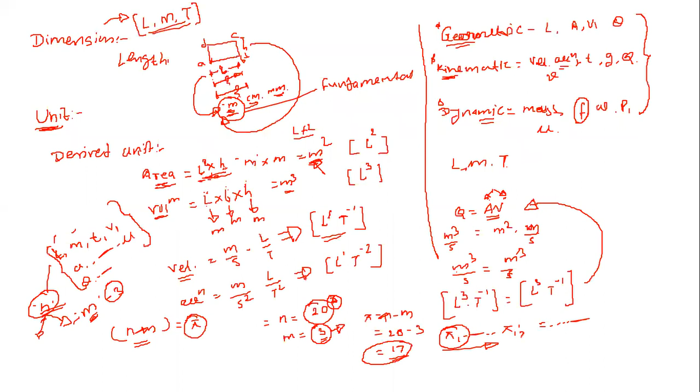Now in today's session, we'll start the next part, that is model, prototype, similarities, similitude, etc.

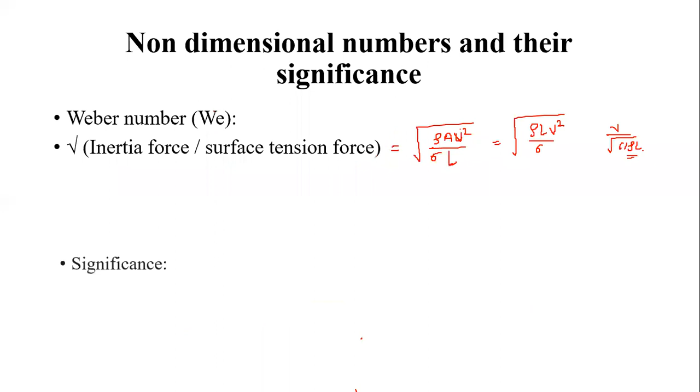In the previous class, along with the Buckingham Pi theorem and its significance, we discussed dimensionless numbers and their significance. We discussed the Froude number, Reynolds number, Euler number, Mach number, and Weber number, along with their significance, and we also discussed examples asked in various GATE examinations.

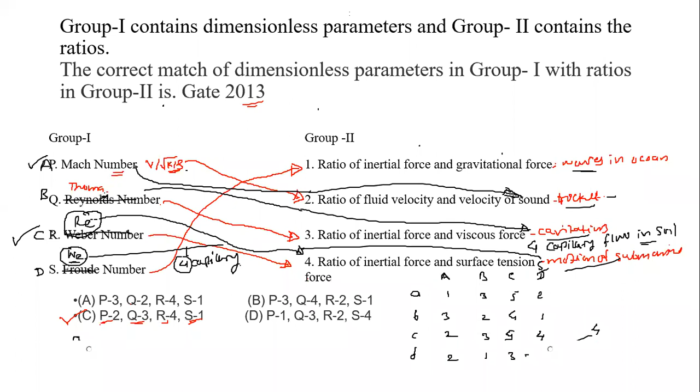Now, today we'll go for the types of similarity, but firstly, before proceeding to the types of similarity, I would like to highlight the things related to model and prototype. What does it mean by model, and what does it mean by prototype?

So, a model is nothing but a replica. A prototype is an actual machine, whereas the model is nothing but the replica of that prototype.

As an example, whenever we want to prepare any plan of a building, that may be 2D or 3D in AutoCAD, whatever sketch we prepare in AutoCAD is nothing but the model of the actual machine or actual structure which will get constructed in reality on the ground. It means whatever building you are going to construct on the ground, its replica we are making in the AutoCAD software, and that is nothing but the model of that structure.

Similarly, whenever we want to construct any big hydraulic structures, for example a weir, a dam, hydropower stations, or a bridge, it's required to go for analysis of the structure under various forces. We have to analyze the behavior of the structure under the application of various forces.

Because if there is submergence or overflow of the dam, it happens rarely, but in case of weirs, it happens frequently. During the monsoon season, each and every weir undergoes submergence.

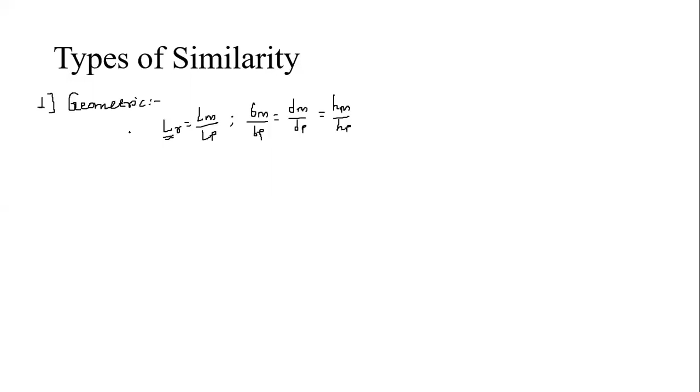Then the next scale ratio that comes under geometric similarity is the area scale ratio - area of the model divided by area of the proto. If this ratio comes out the same, then we say there is a geometric similarity for the area scale ratio.

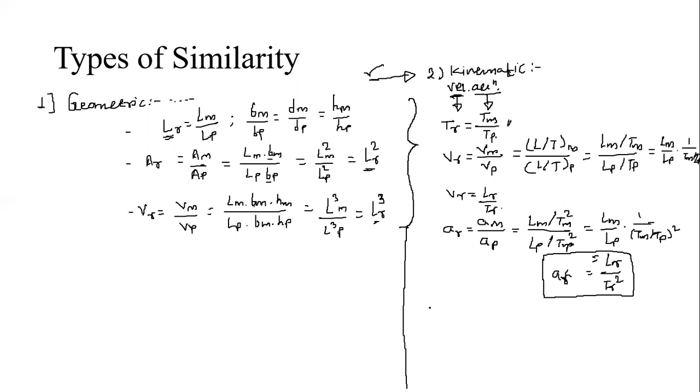Or the next similarity for kinematic similarity is about discharge. So that is QR, the discharge scale ratio. That is discharge in the model divided by discharge in the proto at a particular point or location, QM by QP. Now we know that discharge has unit meter cube per second.

Meter cube per second means length cube in the model divided by time in the model, divided by, for the proto, length cube of the proto divided by time in the proto. So that equals LM cube divided by LP cube into 1 by time in model divided by time in proto. That equals the cube of the length scale ratio upon the time scale ratio. This is about the discharge scale ratio.

It means if these three similarities exist between the model and prototype, then we can say that the model and prototype are kinematically similar to each other. Whatever discharge is happening in the model and prototype, whatever fluid is flowing through it, if its velocity, its acceleration, and the discharge in the model and prototype at a particular location are the same, then we can say that model and prototype have kinematic similarity. And to have kinematic similarity, geometric similarity is a must.

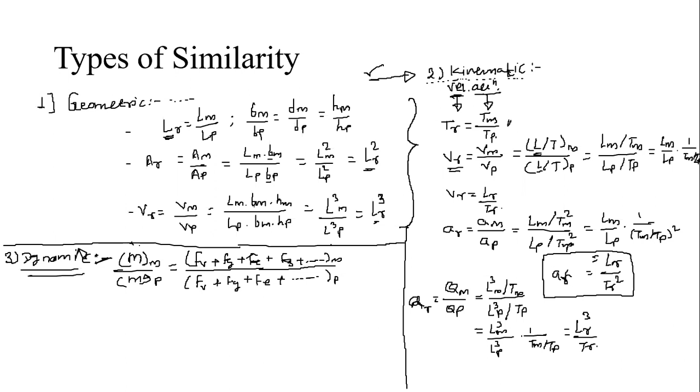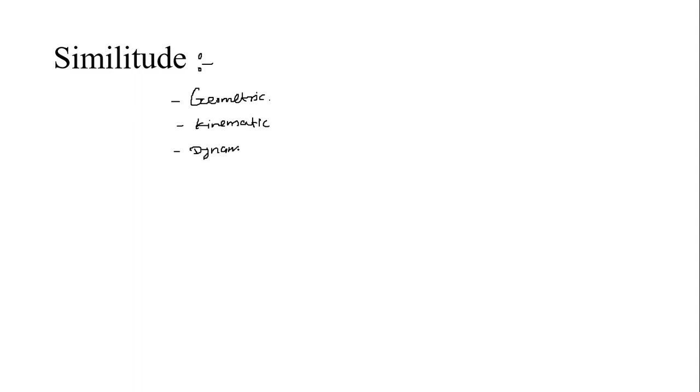If there exists geometric similarity, kinematic similarity and dynamic similarity between the model and prototype, then it is considered a similitude. Meaning, if you say a similitude, it means that particular model and prototype are geometrically similar, then kinematically similar, and the third one is dynamic similarity. If all three similarities exist between the model and prototype, then we say that is a similitude.

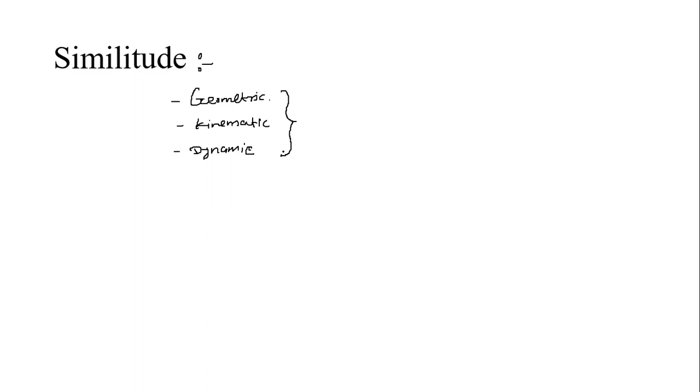Okay, this is about the basic idea of similarities and similitude. Now, to have those similarities, or to govern those things, different model laws are established, which are also called similarity laws. The similarity laws we are going to study here are the Reynolds and Froude models. So what are the Reynolds law and Froude law? We are going to discuss these model laws or similarity laws in detail now.

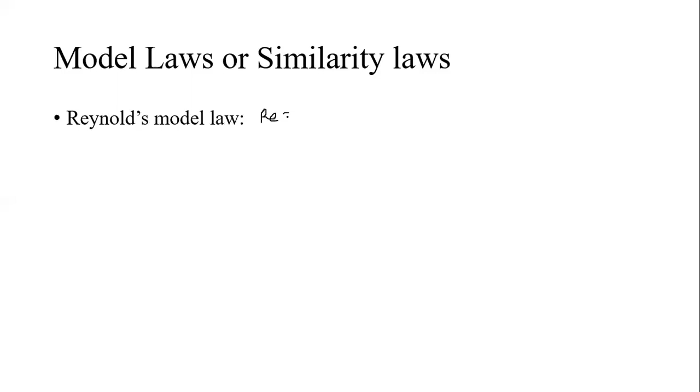Okay, first one is the Reynolds law. What is the Reynolds law, or what is the Reynolds number? Reynolds number is nothing but rho V D by mu. In short, I would like to go for Reynolds number, Re equals rho V D divided by mu, where D or L is the characteristic dimension. Most of the time, for pipe flow, or for rivers and streams, we consider the dimension as length, that is rho V L by mu.

This is our Reynolds number. It means that for the fluid flows, for the flowing fluid where the viscosity is the dominating force, then in that case, to have a similarity or to bring the similarity between the model and prototype, we need to go for the application of the Reynolds law. That is, when we come across flow conditions where viscous force is a dominating force, then in that case we need to go for the Reynolds law and the Reynolds model law.

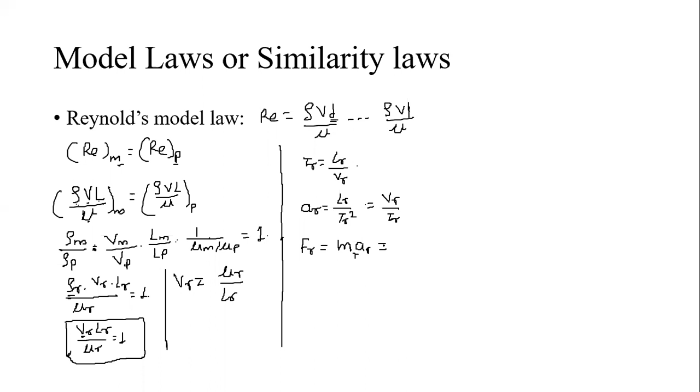Then for the force scale ratio, as per the Reynolds law, force will be equal to mass into acceleration - rate of change of momentum with respect to time due to the application of the force. So m into a, that is mass scale ratio into acceleration scale ratio. Mass per unit time is density into volume, that is volume per unit time, that is Q as area into velocity. So that will be density rho r into ar into vr, that is velocity scale ratio, into the acceleration scale ratio as ar as it is. This is for the force scale ratio.

And for the discharge scale ratio, qr will be area into velocity, that is area scale ratio into the velocity scale ratio. This will be the combination for that.

Those are the various ratios we can say as per the Reynolds model law. When we have to go for the Reynolds model law, whenever the dominating force or the fluid condition given to us is having a dominance of the viscosity force, then in that case, for the preparation of the model of that prototype, we need to go for the Reynolds model law. By applying that Reynolds model law, we will be able to predict the various dimensions related to that prototype.

From the various dimensions of that model, for the given prototype, it means it is applicable mostly for the motion of the airplanes. There, what should we do? In the motion of the airplanes, we need to go for Reynolds model law. Then flow of incompressible fluids, that is flow through the pipes. Motion of submarines which are fully submerged in water. Then flow around structures, that is weirs or piers we can say, and other bodies, those are completely immersed in a moving fluid.

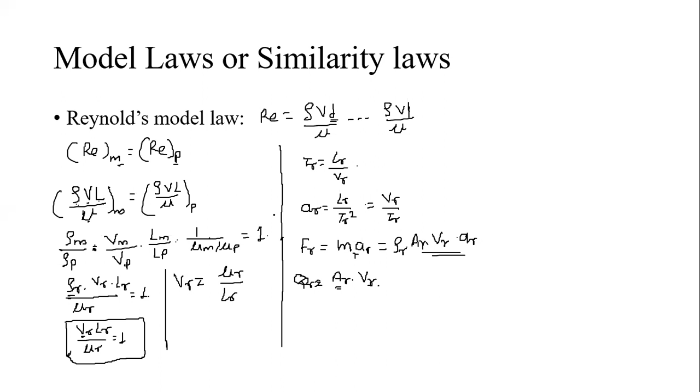Then the next one is the Froude model law. Means for the construction of the structures, or sorry, construction of the models of various structures where the flow is due to the gravity, in such cases we need to go for the Froudian model law or the Froude model law. So we'll go for that Froude model law now.

Where will we be required to go for a Froude model law? That also we will go for significance at last. But at the beginning, I want to have an understanding about that. Whenever the flowing fluid or the motion of the fluid is due to gravity, or whenever the gravitational force is a dominating force along with the inertia force, then in that case we need to go for the Froude law. So as in the previous case, whenever we are going to design any model of a prototype based on the Froude's law, or where the dominating force is the gravity, the first assumption is that the Froude number at a particular point in the model must be equal to the Froude number at a particular point in the prototype.

This is the basic idea. Then we have to go into details, meaning we have to put up the equation formulae for the Froude number. This formula is related to the flow under gravity, so it is related to open channel flows most of the time, or flows having a free surface, a top free surface. I would like to go for the formula like that.

In general, we know the formula for the Froude number as v by root gd. So here the formula will be velocity upon the square root of g into, instead of d, I am considering here a length. Length of the channel or cross section of a model must equal the ratio of velocity with respect to gravity and length of a prototype. If these things exist, then we can say there is an application of the Froude model law, or the particular model is designed based on the Froude law.

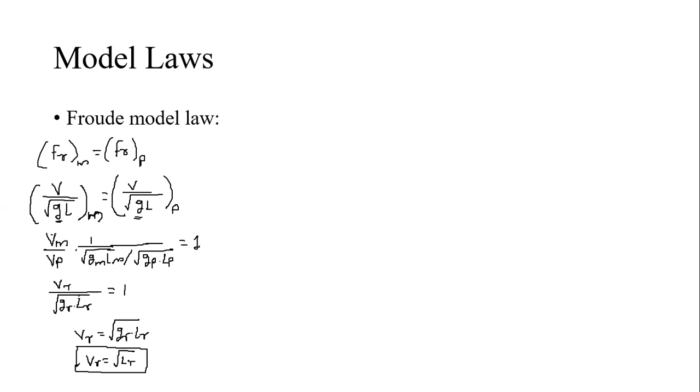Now the various scale ratios related to time, velocity, acceleration, force and discharge from the Froude's model law, we'll derive them now.

First one I have to go for is the time scale ratio. So time scale ratio Tr is equal to length of a model... time scale ratio equals Lr by Vr. How did I write Lr by Vr here? We know that velocity equals length upon time, velocity is the rate of change of length with respect to time. So T will equal L by V. Just now, in the form of Vr, I have written Lr in the form of the ratios.

Time scale ratio TR is equals to length scale ratio divided by velocity scale ratio. We know the velocity scale ratio Vr is root of Lr. So TR is equals to Lr divided by root of Lr, that is root Lr into root Lr divided by root Lr. One root Lr gets cancelled, so time scale ratio will be equals to root of Lr only. So velocity scale ratio and time scale ratio for the models will be prepared by Froude's law, and it will be the same, that is root Lr.

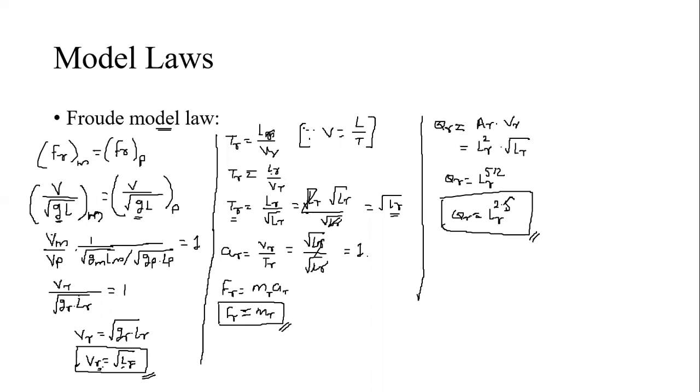So this is about the basics those we are required for solving the various numericals and questions those were asked in the GATE examination. Now we'll go for the questions directly, and I would like to take the questions now.

The first question was asked in GATE 2015. What is the relation between the length scale ratio LR and the velocity scale ratio VR in hydraulic models in which Froude dynamic similarity is maintained? The options given are: VR equals LR, LR equals root of VR, VR equals LR to the power 1.5, and VR equals root of LR.

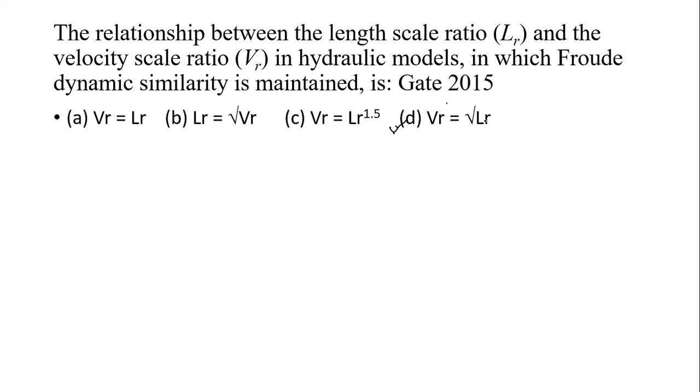The next question I would like to go for is related to models in a laboratory. It was asked in GATE 2018 for 2 marks in set 1. The question is like this: in a laboratory, a flow experiment is performed.

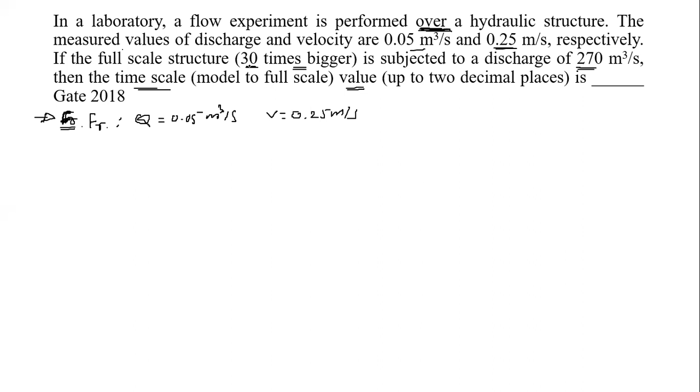So if you go for the length of model to the length of prototype, that is the length scale ratio I want to find: length of model divided by length of prototype, where 30 will relate the length of model and the length of prototype.

Will the model length be 30 or the prototype length be 30? The prototype length will be 30. Exactly, it means the length of model will be 1, then in that case the length of the prototype will be 30. This is the idea they had given to us.

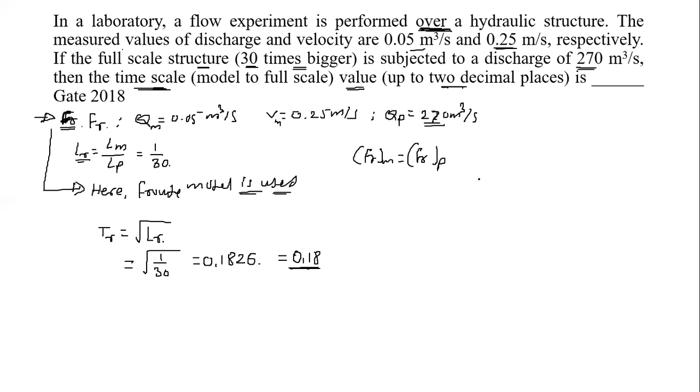So the next question we will go for now. This one was asked in GATE 2008 for 2 marks. I would have to go for it here, they had given options also. Previously they were giving options, but nowadays for the numerical oriented questions, they directly ask for the answer.

The question is: a river reach of 2 kilometers long with maximum flood discharge of 10,000 meter cube per second is to be physically modeled in the laboratory. These dimensions are related to the prototype actual river, where maximum available discharge is 0.2 meter cube per second. It means the discharge in the model will be 0.2 meter cube per second. Then for a geometrically similar model based on equality of Froude number, Froude's law will be applied here.

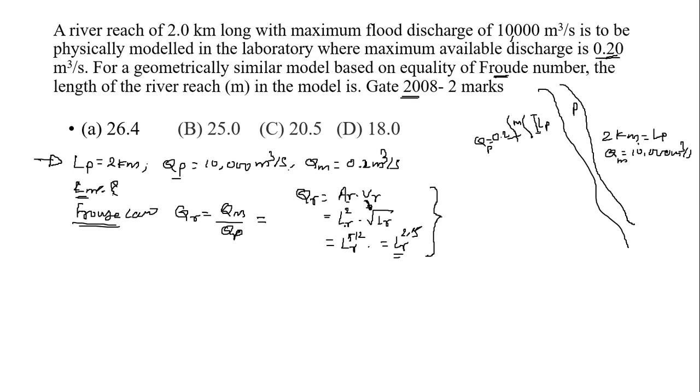What is the velocity scale ratio? As per the Froude law, what is the velocity scale ratio? Is it root LR? Root LR, sir. And if you go for the combination of the powers, that is LR raised to 2 and LR raised to 1/2, then we get the power of LR as 5/2, that is LR raised to 2.5. When you're not remembering the equation or the ratios, the basics must be clear.

So we know QR is equals to LR raised to 2.5 or 5/2, and QR is nothing but QM by QP, which equals LR raised to 2.5. LR raised to 2.5 means length in model divided by length in prototype. So QM divided by QP equals length of model raised to 2.5 upon length of prototype raised to 2.5.

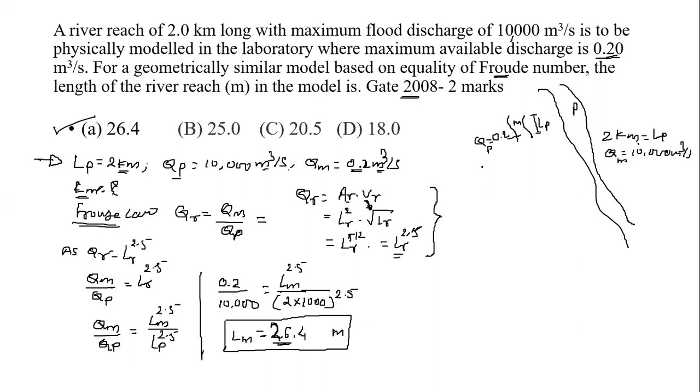Just a minute. This was asked in GATE 2007 for 2 marks. I would like to go for this question firstly: a 1 in 50 scale model, means length scale ratio is given to us, length of 1 meter in the model, 50 in prototype. A 1 in 50 scale model of a spillway is to be tested in the laboratory. The discharge in the prototype is 1000 meter cube per second. The discharge to be maintained in the model test is required. This is like the previous example, but some changes have been given, the scale ratio has changed here. In the previous one, they had given directly discharge scale ratio and asked for length. Here, length scale ratio is given to us and they have asked for the discharge.

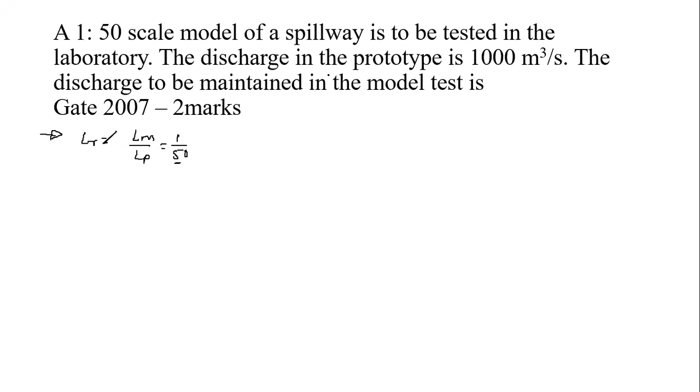Now we'll go for the solution part of this. Firstly, I would like to go for the data which is given to us. As we now know, this is like the previous example. I'd like to go for length scale ratio. LR is equals to length of model divided by length of prototype, which equals 1 by 50. It means if the length of prototype is 50 meters, then length of model will be 1 meter. That's the idea. Then what is given to us? A 1 in 50 scale model of a spillway is to be tested in the laboratory, and the discharge in the prototype is 1000 meter cube per second. So discharge in prototype is given as QP equals 1000 meter cube per second. Discharge to be maintained in the model, that is QM, they have asked.

In the model, what will the discharge be? This question was asked in 2018 also, and in 2007 too. In 2007 they had given options: 0.057 meter per second, 0.08 meter per second, 0.57 meter per second, and 5.7 meter per second. Okay, let it be, it doesn't matter.

We'll go for the solution part and see which option is correct for this particular case. Option A is correct. Now we'll go for the solution. How to go for it? Firstly, we must decide on which law this model will be prepared. Which law will be used? Is Reynolds law used or Froude law used?

Which one, Reynolds or Froude? Froude model. But why Froude model law? Froude law will be the best. But why will this model be prepared according to Froude's law?

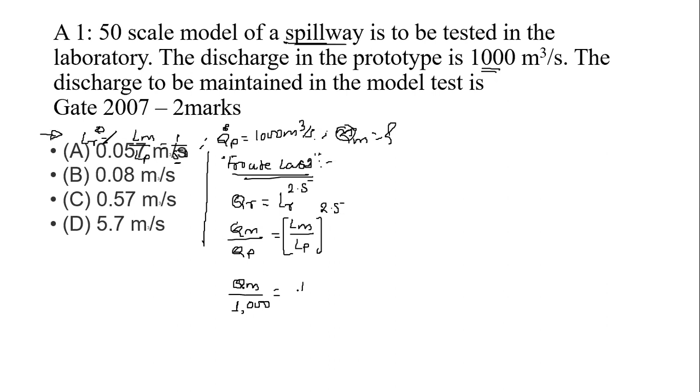Discharge in the model, which is unknown to us, divided by discharge in the prototype, which is 1000, equals the length scale ratio 1:50, raised to 2.5. We just have to simplify it. So QM equals 1000 into (1/50) raised to 2.5. Now tell me the solution, the final answer.

Final answer: option A. 0.0565... 0.056... 0.056... 5.

Now by looking at the options, we have to select the appropriate one. First option is 0.057, second is 0.08, third is 0.57, and last is 5.7. All answers are close to each other except B. We find the remaining three options close to each other - meaning if 1000 became 100 or 1000 became 10,000, you would get a change in the answers. That is the idea.

Okay, so now if you go for rounding the same, we get QM equals 0.057 - the 6 becomes 7. So the correct option is option A, that is 0.057.

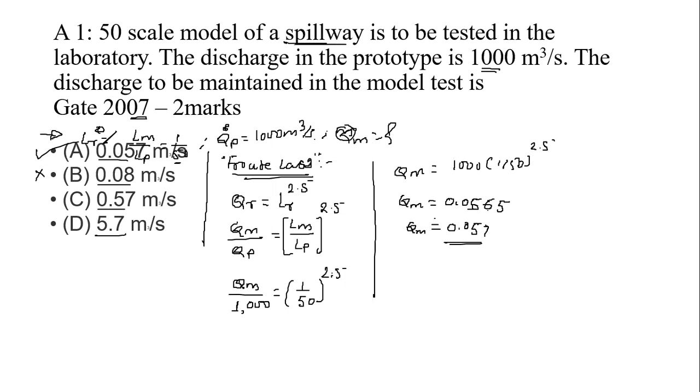Now we'll go for the next one. It was asked in GATE 2018, one and the same as the previous one, but the statement they have changed. Okay, so I will go for that one firstly - a 1 in 50 scale model, meaning the scale ratio regarding length is given to us.

I would like to go side by side here. They had not given the options because they asked up to 2 digits. So I will go for the question firstly: a 1 in 50 scale model of a spillway is to be tested in the laboratory. The discharge in the prototype is 1000 meter cube per second. The corresponding discharge in meter cube per second, up to 2 decimal places.

Up to 2 decimal places means we have to maintain 2 decimal points in the model, neglecting variation in acceleration due to gravity in the test. That means the gravity acceleration, the GR term in Froude's law, for gravity for both the model and prototype will be the same, 9.81. That's why it is asked to neglect it. Then the acceleration scale ratio AR is 1. Is it like that? Yeah, for Froude's law it is 1.

For which case is the acceleration scale ratio equal to 1? Reynolds law or Froude's law? Froude's law. If we neglect them, there will be no alteration in our solution.

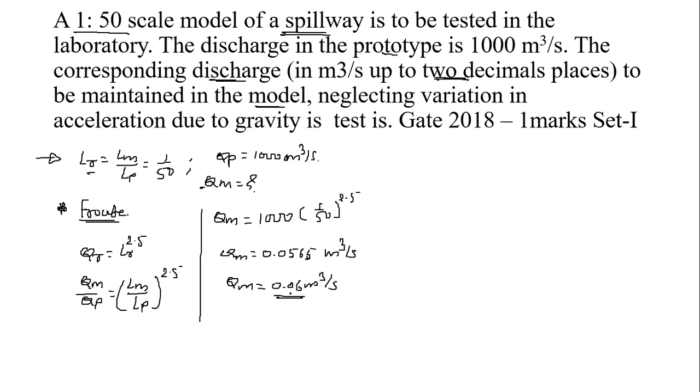It will be the correct answer for this given question. Okay, now we'll go for the next question, which was asked in GATE 2001 for 2 marks. Many examples you will find like this one.

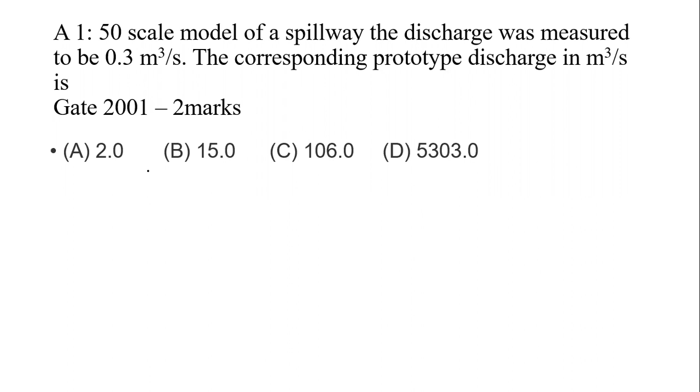Now we have to go for the solution. Option D is the correct one, but we still have to solve the question. Firstly, understand the question: what they had given. Firstly, they had given a scale, which is 1:50, so I would like to proceed with the solution.

Given scale ratio LR equals to length of model divided by length of proto, equals to 1/50. Option D is the correct one, but do solve the question. Length of model to length of proto, scale as 1:50, they had given. Then it is related to the spillway.

So once again we will be required to go for the Froude model law. Then the discharge measured on that model is 0.3, meaning QM given to us is 0.3 meter cube per second. And what they asked is the corresponding prototype discharge, QP.

First we must know which type of law is used. Here the governing law used for designing the model of the spillway is Froude's law. I'm writing here with a star: Froude's law will be employed herein.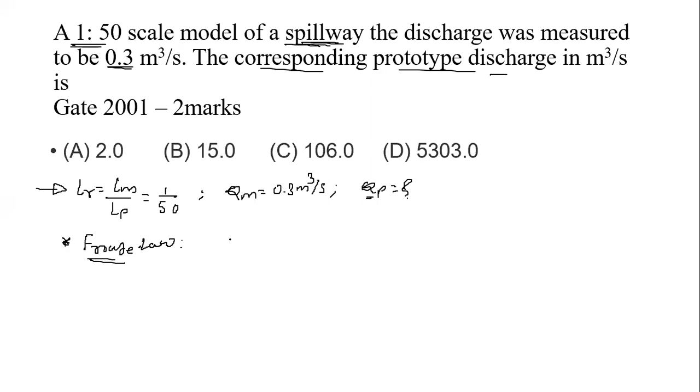As per Froude's law, now we have to find QP, meaning we have to go for the discharge scale ratio, because the discharge scale ratio links the length scale ratio with the discharge. QR equals LR raised to 2.5.

Now put the values. QR is nothing but the discharge in model divided by discharge in prototype, which equals length of model divided by length of prototype raised to 2.5. Discharge of model is given, prototype is asked. So discharge of model is 0.3, divided by discharge in prototype equals LM by LP which is 1:50, so 1/50 raised to 2.5. Just simplify it and you will get the answer for discharge in the prototype.

So what is the answer for the prototype? Tell me the answer, don't tell me the option. 5303.03. Okay, meter cube per second. This is the correct answer which you are getting by calculation.

Now we have to check this answer with respect to the available options. A is not matching, B is also not suiting, C is also not, D if you look, 5303.0 is there, but the .03 is not given. If you go for rounding up, 3 will not make any sense, it is not going to make 0 into 1. So by rounding it, you will get option D as the correct option: 5303.0 meter cube per second.

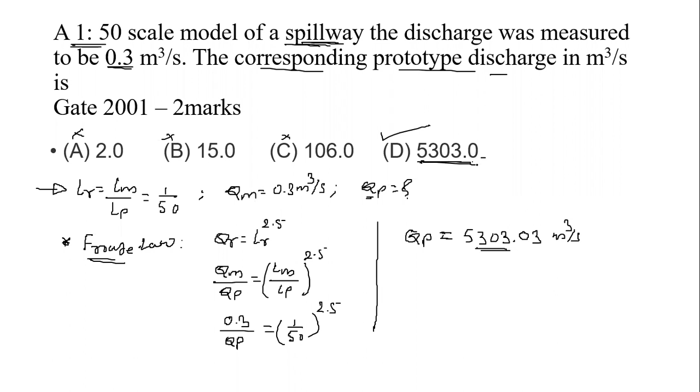Now we'll go for the next one. This was for GATE 2001 and it was for 2 marks. Simple steps are there, the thing is we have to remember the relationship and the model law or similarity law which is used.

Next one, go through this one. I think this is not that much difficult. It is also similar to the previous one, but we have to adopt a different scale ratio to get the answer. I'll go for the statement first. It was asked in GATE 1991 for 2 marks. The statement is like this: a 1:50 model. A 1:50 model of the Ogee spillway means once again Froude's law will be applied here.

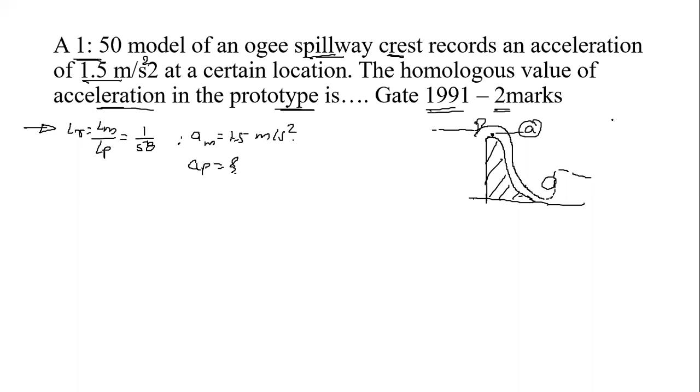यानी कि ये आपका मॉडल है, मान लो आपका प्रोटोटाइप थोड़ा सा बड़ा है। Suppose this is our prototype, it will be in a larger dimension than that of the model. मान लो कि यहाँ से मॉडल पे 1 मीटर पे मेजर किया है तो यहाँ पे 50 मीटर पे आ जाएगा। इस पॉइंट पे जो एक्सेलरेशन रहेगा प्रोटोटाइप का, that acceleration is asked to calculate.

Anyone tell me why someone has given the answer as 1.5? Sanket, tell me why 1.5 and how 1.5? एक्सेलरेशनचा रेशो सर 1 असते ना, मॉडेलचं एक्सेलरेशन आणि प्रोटोटाइपचं एक्सेलरेशन. Right, exactly. 1.5 आल्याशिवाय 1 येणार नाही. Exactly, directly you will get the answer here.

So what is that? By Froude law. Here the law which will be used, that will be the Froude law. And as per the Froude law, acceleration scale ratio is 1. So acceleration scale ratio क्या करेगा? Acceleration in a model at a particular point divided by acceleration in a prototype at a particular point is equals to 1.

मॉडल का दिया है हमें 1.5 है, put up the values. 1.5 divided by acceleration in the proto is equals to 1. That is, let's simplify it. 1.5 is equals to, I'm taking this acceleration in proto here, 1 into acceleration in the proto. That is, acceleration in the proto will be equals to 1.5 meter per second square.

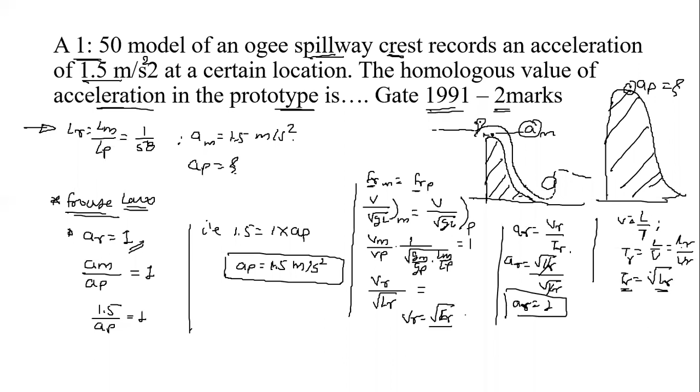Just it was asked in GATE 1995 for 2 marks. Question क्या है? Once again, same one, only scale ratio and the discharge is changed, acceleration is changed. What they had given now: a 1:30 model of an Ogee spillway crest records an acceleration of 1.3 meter per second square at a certain location. The homologous value of the acceleration in the prototype is कितनी रहेगी, उसके ऑप्शंस दे दिए हमें उन्होंने। I will go for options also. A has 0.043, B has 0.237, C has 1.3 and D has 7.12. Now bolo, what will the answer?

ऑप्शन सी, 1.3। Option C. क्यों आएगा रे ऑप्शन सी? Now I want to have a justification from your side। क्यों रहेगा? See, so many answers I got in the chat box. Why answer C? Anyone?

Why is answer C correct? Let's say AR is equal to AM by AP. AM's value is given as 1.3. As per Froude's law, it will be designed using Froude's law.

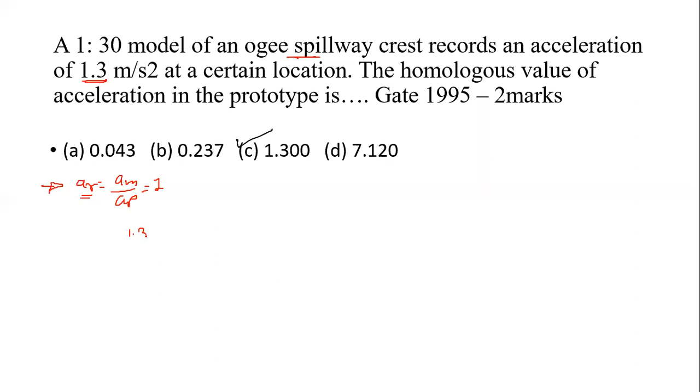As per Froude's law, acceleration scale ratio is AM by AP, which equals 1. The model's acceleration is given as 1.3, so putting it in: 1.3 divided by AP equals 1, so 1.3 equals AP. They had given us 2 extra digits, so the correct answer will be 1.3.

So this type of question was asked twice in GATE examinations, once in 1995 and the previous one in 1991. In 1995 they asked it for 1 mark, though by mistake I had written here 2 marks. It was for 1 mark.

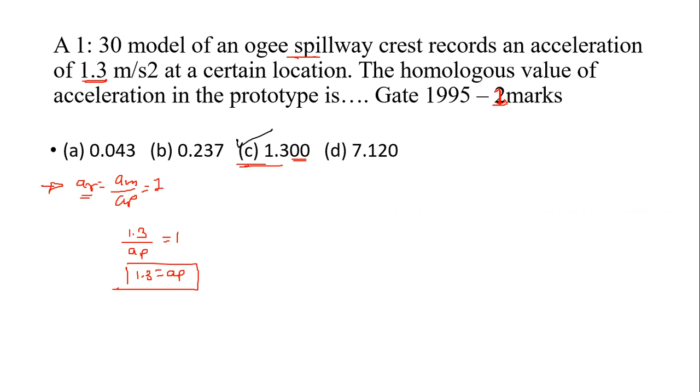So likewise, many such questions used to appear in GATE examinations based on Froude's and Reynolds' laws. There are a number of such questions. Let's go to the next one, from GATE 2003, for 1 mark.

A laboratory model of a river is built to a geometrical scale of 1:100. The fluid used in the model is oil of mass density 900 kg per meter cube. The highest flood in the river is 10,000 meter cube per second. The corresponding discharge in the model shall be?

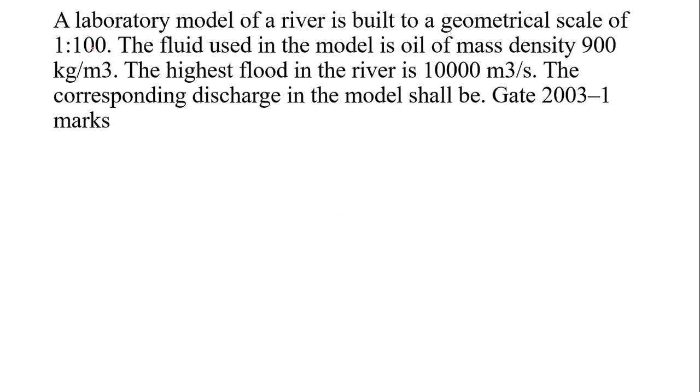First, understand the phenomenon here. What have they given us? A laboratory model of a river is built, meaning the scale ratio given to us is the length scale ratio. This is LR, LM by LP, equals 1/100. If the model's length is 1 meter, the prototype's will be 100 meters.

The fluid used in the model is oil of mass density 900 kg per meter cube. So whatever density is given to us, density of liquid in the model is 900 kg per meter cube. Options are also given to us - by mistake I had written something here, let it be for now.

Then, the highest flood in the river - this discharge is related to the prototype. QP is 10,000 meter cube per second. What they asked is the corresponding discharge in the model, QM equals question mark. Options given are 0.095, 0.1, 0.105, and 10.5.

I got the answers in the chat box. Let's go through them. Someone has written 0.1, option B. Again I got 0.1. So now tell me, how did you get the answer 0.1?

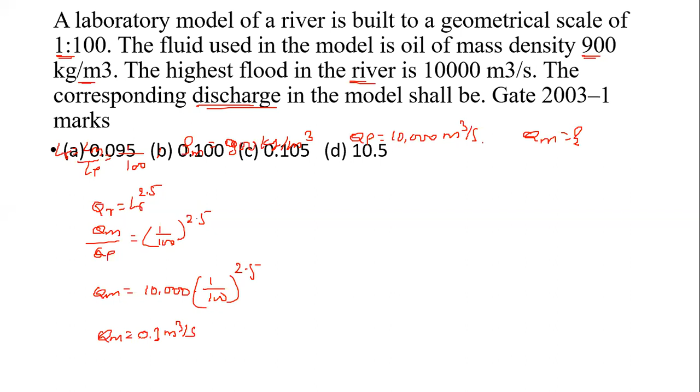How much? 0.1. 0.1 meter cube per second. And as per that, the correct option for the same is option B.

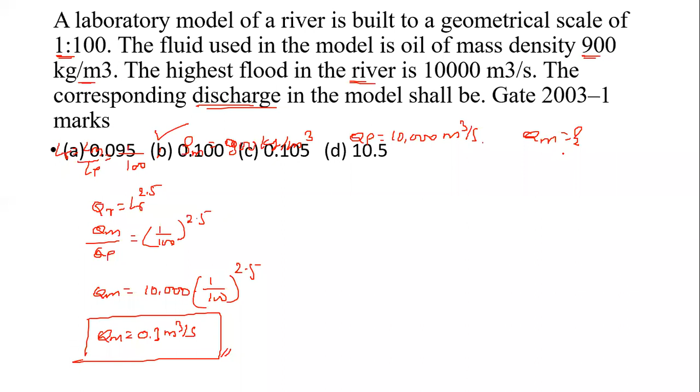It was for 1 mark. Now I'd like to go for another question, as homework for you to go through.

The height of a hydraulic jump in the stilling basin of a 1:25 scale model - the length scale ratio given is 1:25 - was observed to be 10 centimeters. That 10 centimeter height of the jump is in the model. The corresponding prototype height of the jump was asked in GATE 2004 for 2 marks. Options are: first, not determinable from the given data; second, 2.5; third, 0.5; and last, 0.1 meter.

You have to solve it as homework. So what we'll do now is stop here today, and the remaining part with examples and all those things will go into the next lecture.